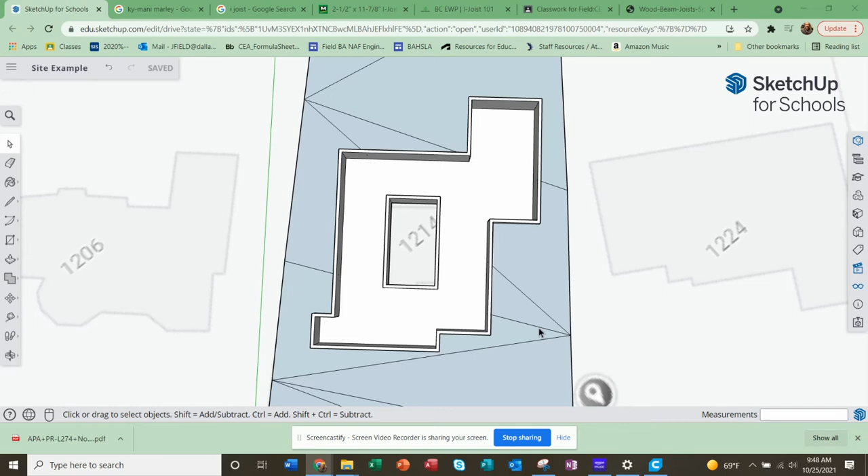Okay, welcome back. So hopefully you have something like this created already.

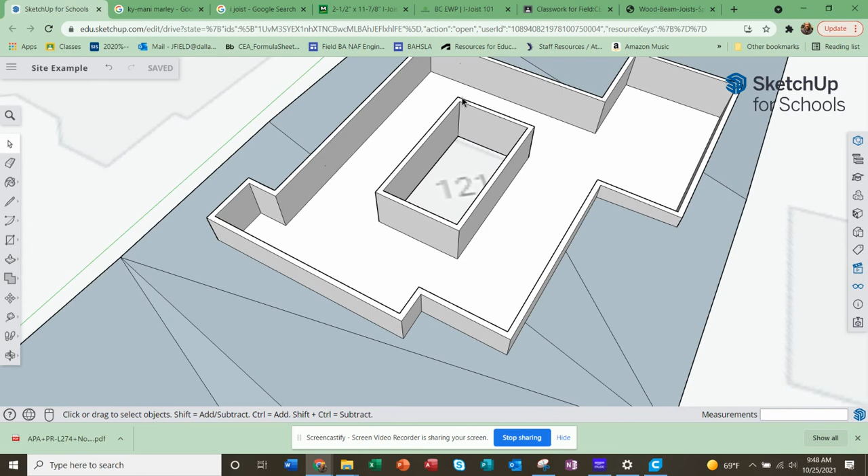You've got your foundation wall going all the way around, 12-inch thick wall, cement foundation wall, 18-inch thick cement slab. I'm going to leave mine open in the middle, and I realized that what I'm probably going to propose is that it actually will have a tree coming up through the middle. In this design, you can actually design it around an existing tree, if that was the desire you had for your lot.

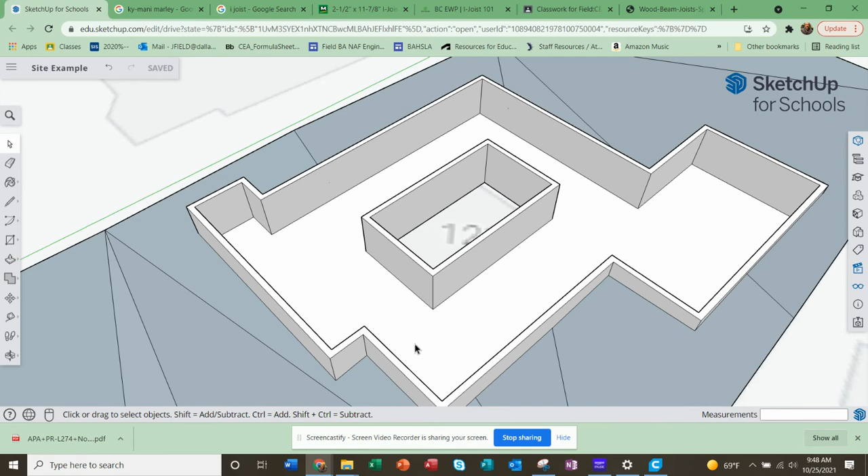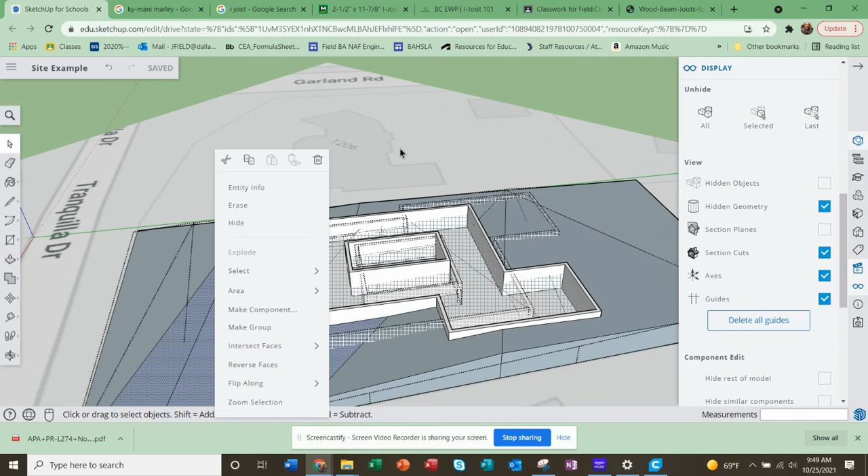And then you can see here, I brought the site elements back. I think a lot of you guys, I had you no-show those. So just go over here first, if you haven't done so already, to hidden geometry and click on all of those holding control, and right click and say unhide. It'll say unhide right here. And then click that back off, done.

Okay, so decking. I've put some resources in the Google Classroom that I want you to look through that are valuable. Here's a couple suppliers, Sherwood and this FP Supply. There's a lot of other suppliers, but both of them, if you look on their links, have pretty much really great detailed drawings and information about the I-joists that they sell and make.

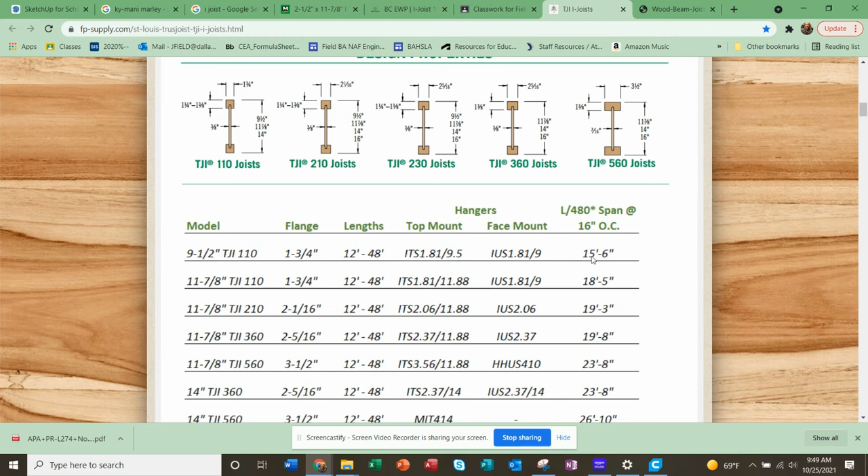And so from these tables, they sometimes refer to these as span tables, because basically, based on the length that the I-joist is spanning, you can spec it out. So you can spec out the joist that you'll need or can use.

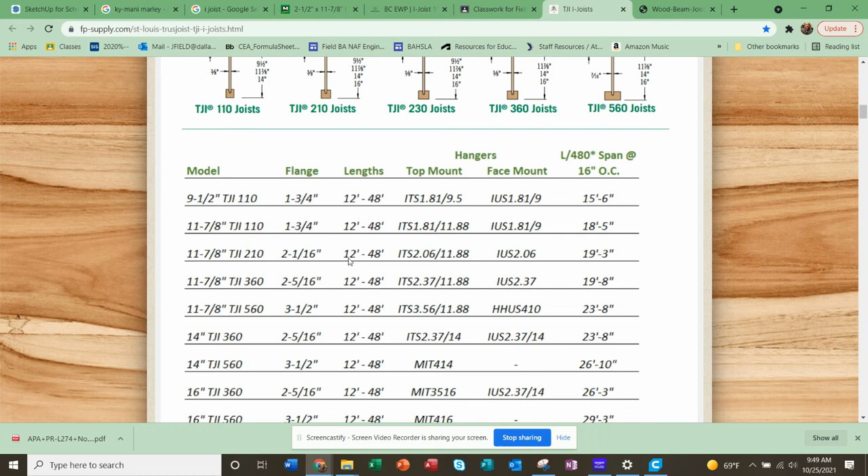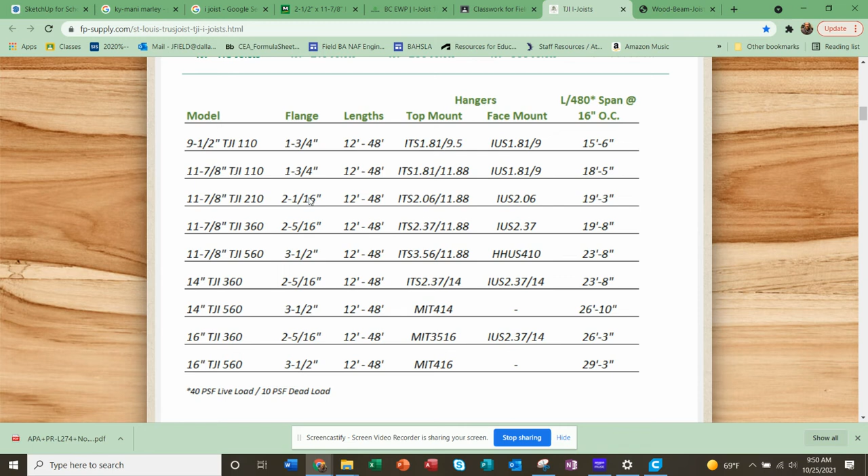So how this works is, this would be a typical span, 19 feet, right? And then it gives you the details about the I-joist itself. What is the model number? What is its flange? Is it top mount and face mount? So it's just information like measurements.

Most of these are going to be in that case where it's an I-joist that's either going to be basically 12 inches or a whole foot, or you can see there's 9.5, which would be classified probably more as a 10-incher. So you got a 10 and 12-inch I-joists. These are laminated up, engineered joists that have a lot more strength and rigidity and structure. So most people are using these, and you can have them every 2 feet instead of every foot, which is really nice. So make sure you're looking through these resources.

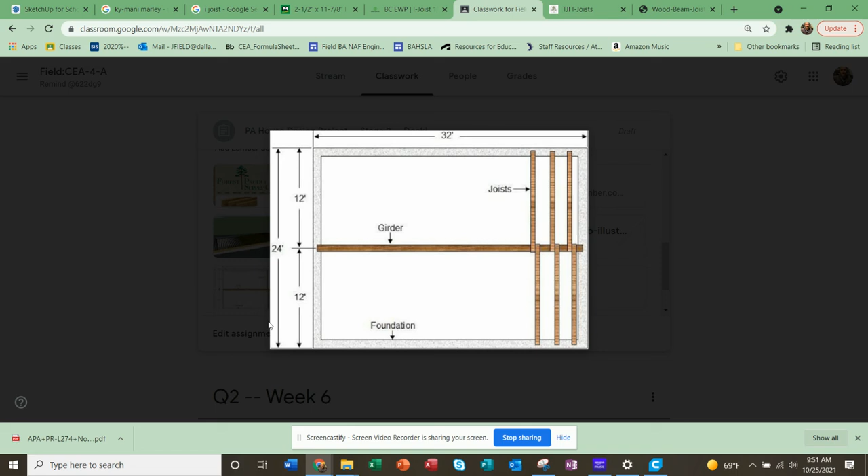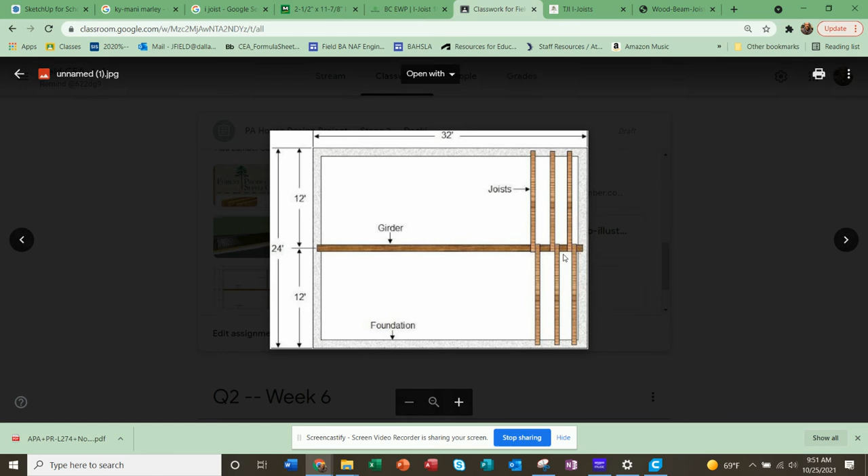Let me pull this picture up and talk about this, because this will apply in certain places. So you see most houses that we live in are built to this understanding. They're probably 24 feet, or roughly feet wide if they are that wide, because they had 12-foot joists originally, and then there was a girder to support them in the middle of the house.

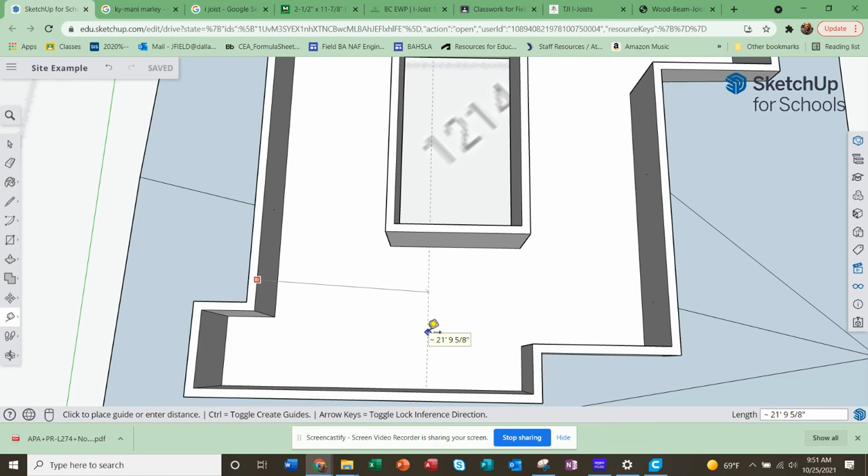Now, with our design, we can do a lot more, but I'm going to say that we should probably try and spec out to stick to the 19-foot joists. So if my math is correct, I'm going to measure from this edge to this edge. And you see, that's 21 feet right now. And that's 15 feet. So that would be fine spanning.

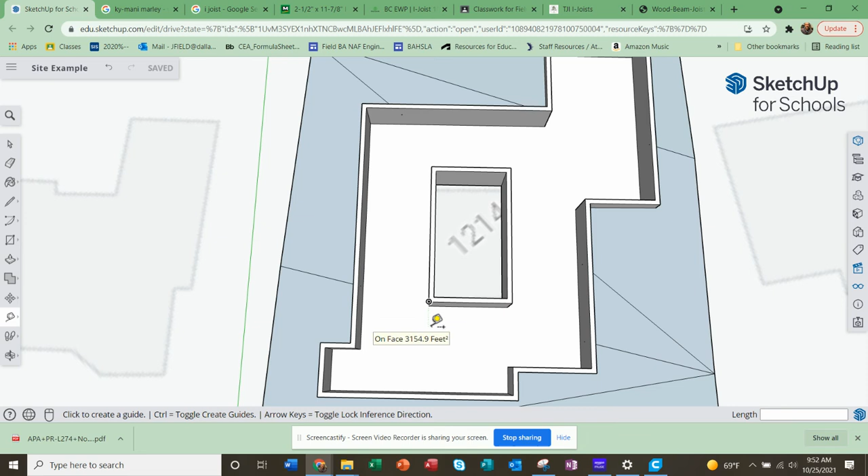But my problem would be here. I'd have to probably, I'm going to need to have 2 beams going across here and here in order to support the longer I-joists. I can see that already. But I'm just going to have to put them in and then go cut and trim them as necessary on my project here.

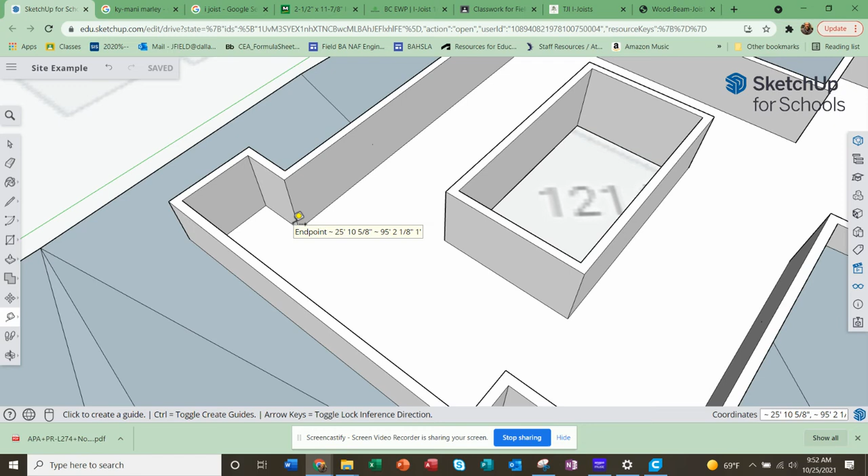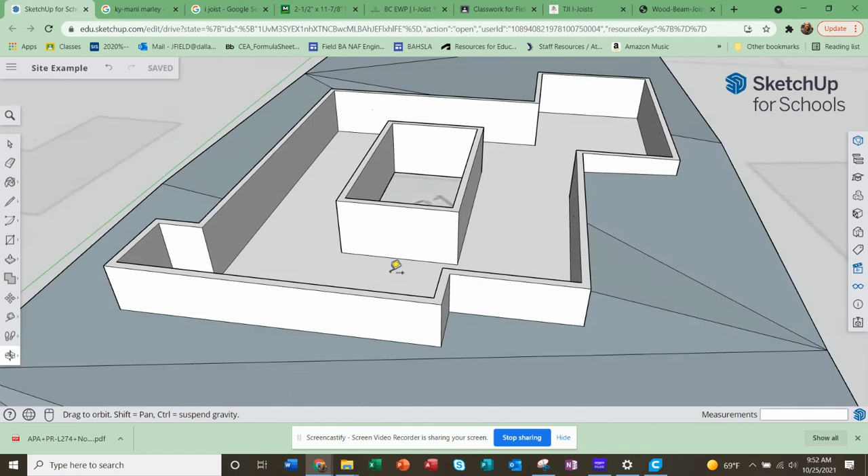Okay, so this decking, by the way, would be for in a case where we're not going to build an ICF wall. And I know I've mentioned ICF walls, but the reason being is I want to model the elements of normal construction for you guys so that you can learn how to deck it out and build it like most builders are building houses with lumbered walls.

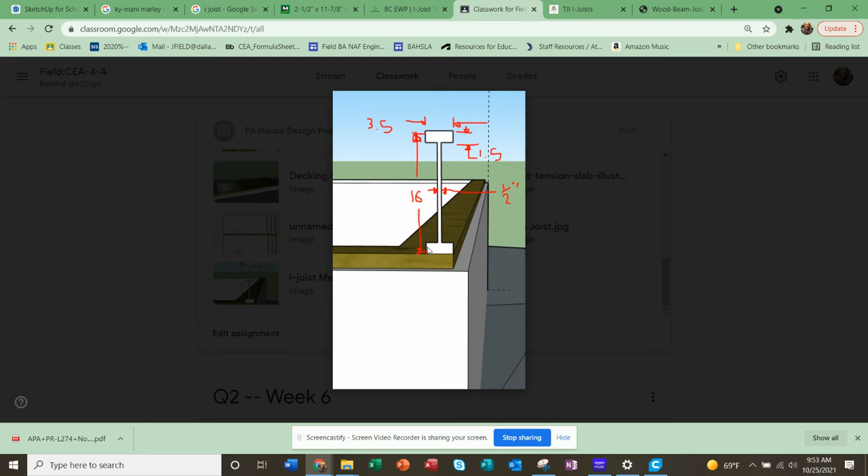Okay, so to put in an I-joist, you basically are going to draw the profile. But let me also, meaning that's why I put this picture in here, you just kind of come here. We're going to put the rim support board all the way around our foundation. And then we're going to draw one of these cross sections of the I-joist like this. And then we're going to extrude that and make copies of that.

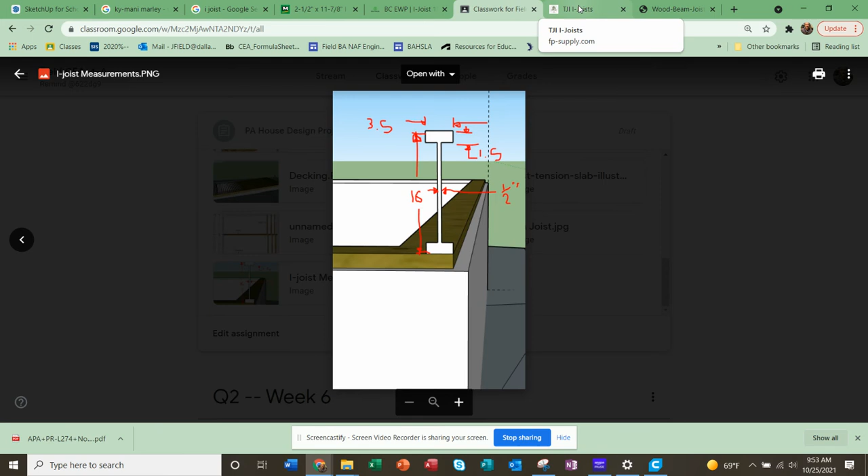So to make that support board, let me do that one more thing. Going back into the classroom, you'll find this really descriptive section of what we're doing. Here you have the foundation, the top of the wall, we're going to put the sill board down, then the decking onto it, a rim joist, exterior sheathing, and then the wall studs. That's a perfect section to memorize, and then the flooring itself. This is going to be nice stiff and rigid flooring, and it won't creak with these solid I-joists in there.

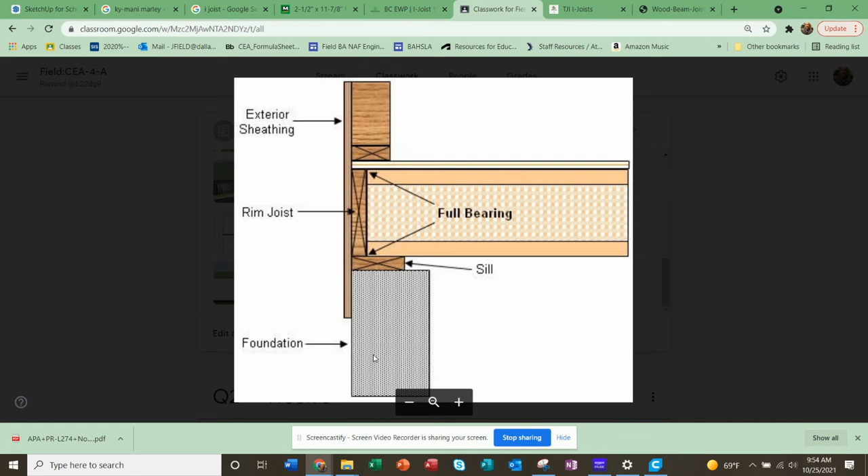So again, the offset tool is going to be our friend. I think in the case of that section that's an 8 by 10, so I should be able to offset this by 4 inches. There we go.

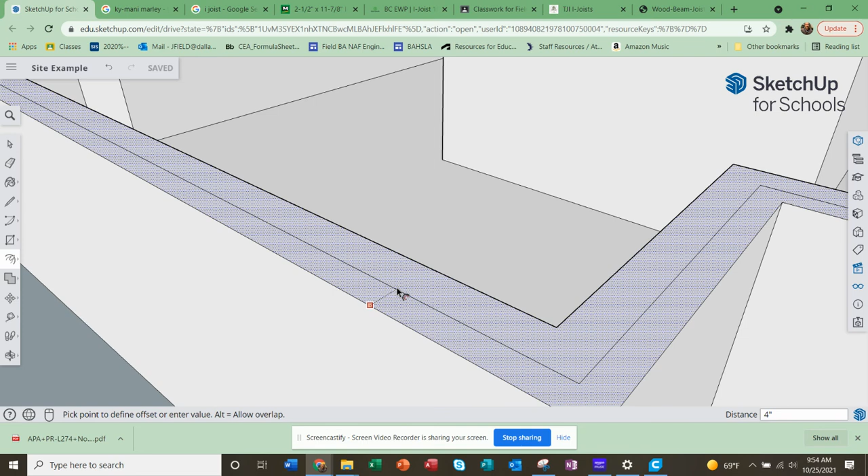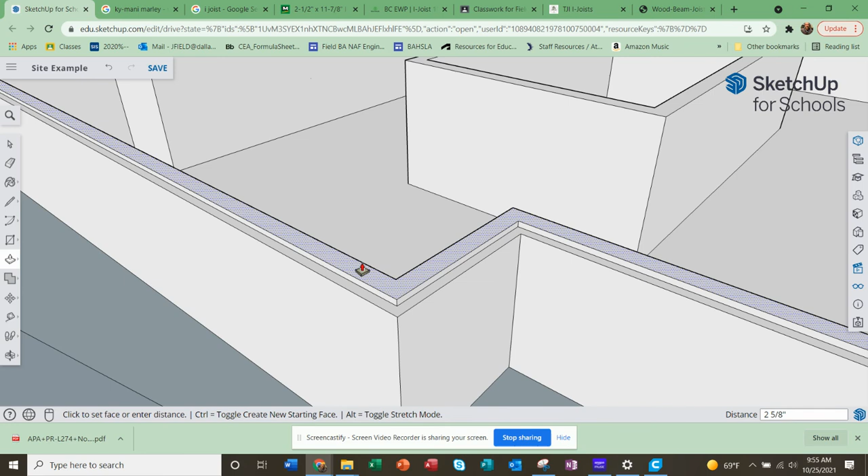Now watch, I can just use my extrude tool, right? Let me go pick it first. And I'm going to pull it up for 2 inches. It actually didn't create it as separate material on this side, you see that? So when I'm pulling up this time, I've got to hit Control. There it is, now it's a separate part. I think the 2 by 10s aren't actually 2 inches thick, they're 1 and 7/8, but I'm just going to round up to 2 for our purposes, okay?

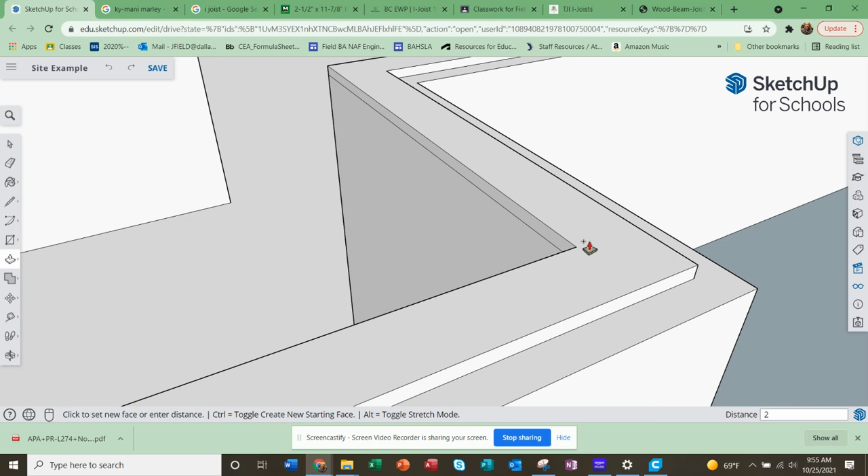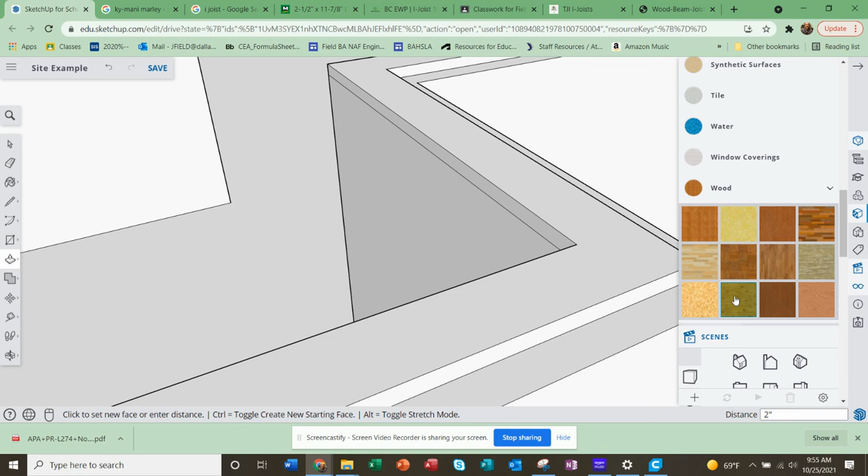And then paint it wood. Plywood in this case, or actually, yeah, that'll work, that finish. Lumber, it's lumber.

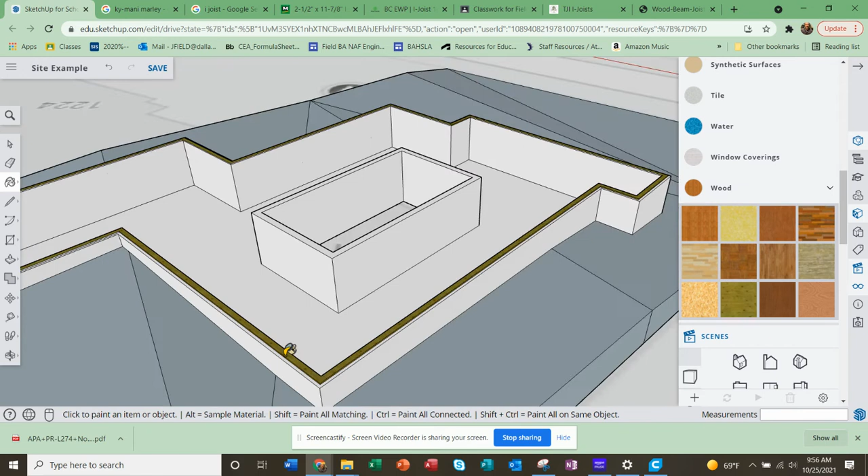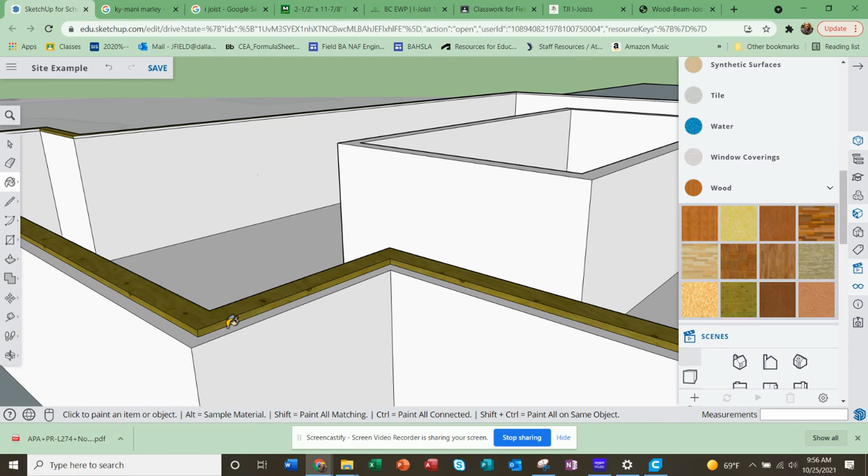All right, put that in. It's kind of fun to build, as long as you take your time. It's a lot easier than putting the real thing in, believe me, out there on the work site, sweating your buns off, doing the real work, which can be rewarding. And obviously it's good paying and can also be rewarding too. But sometimes it's just physical hard work.

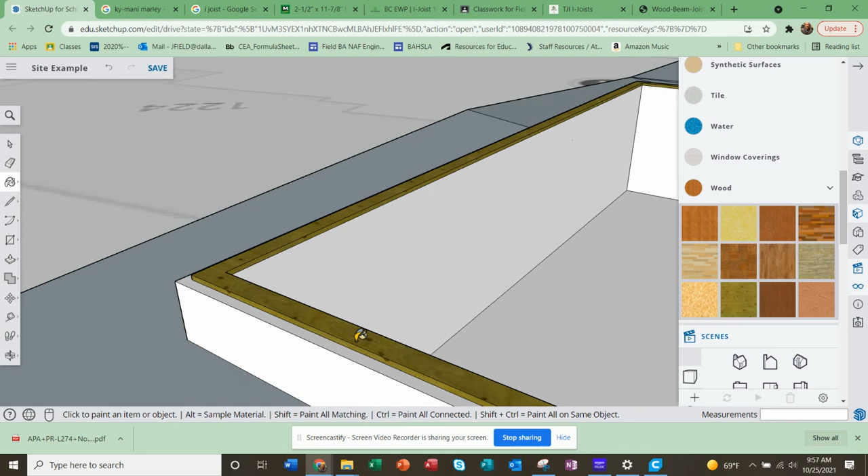Get all those cut. They would actually all, by the way, even if we weren't going ICF walls, there would be rebar coming up through the top of all these walls and going through a hole drilled into this sill, this sill board that we're putting down. There would be rebar sticking up through holes drilled in the sill board, and actually the wall studs themselves would have holes, and also they would anchor. Those would serve as anchors to hold the house down, say for high winds. So I'll show you what that looks like here.

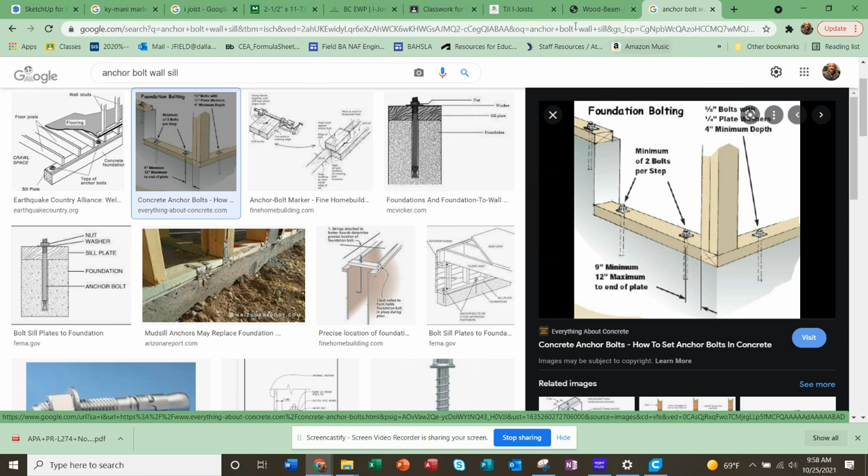This one kind of shows the best picture, and that's how it's done. The hole is drilled into the wall stud and through the sill board and actually molded into the concrete. Then you thread a nut on top to hold the wall down. We're going to skip that element right here.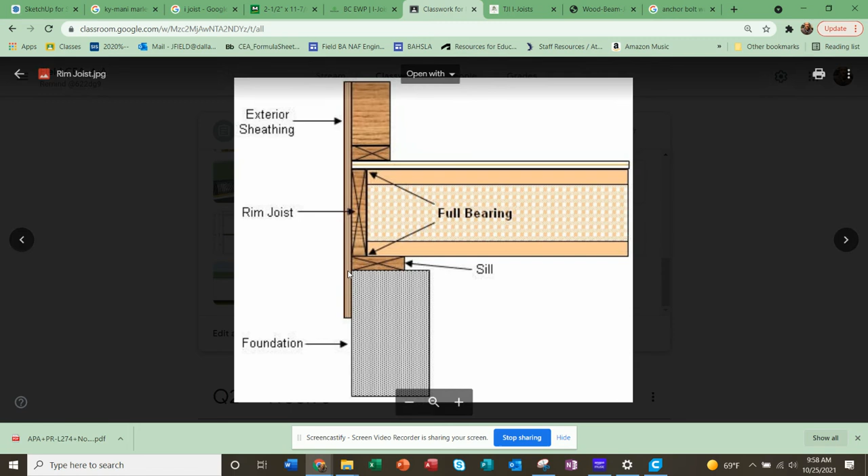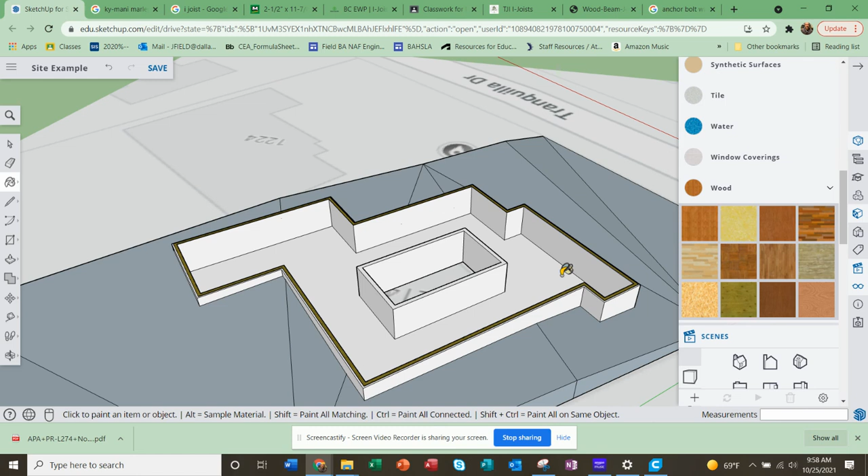Okay, now I'm ready to - and by the way, we'll finish the other parts of this lesson later, the rim joist later on, but we'll focus on trying to model up the I-joist for right now. So I think the orientation that makes the most sense is going this way for my particular build, but that's going to have issues with my house. I'm going to have beam supports on both front and back for the long spans where it's going this way, where it's going this way, and this way. I'm going to have long spans there that I need to support underneath.

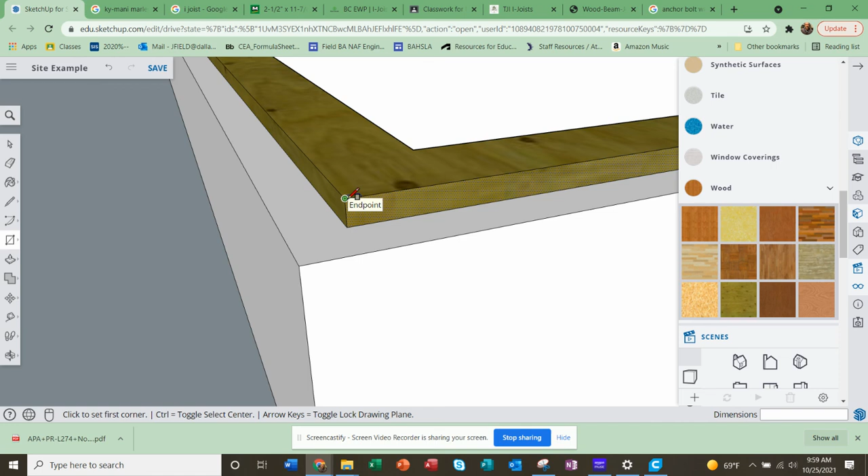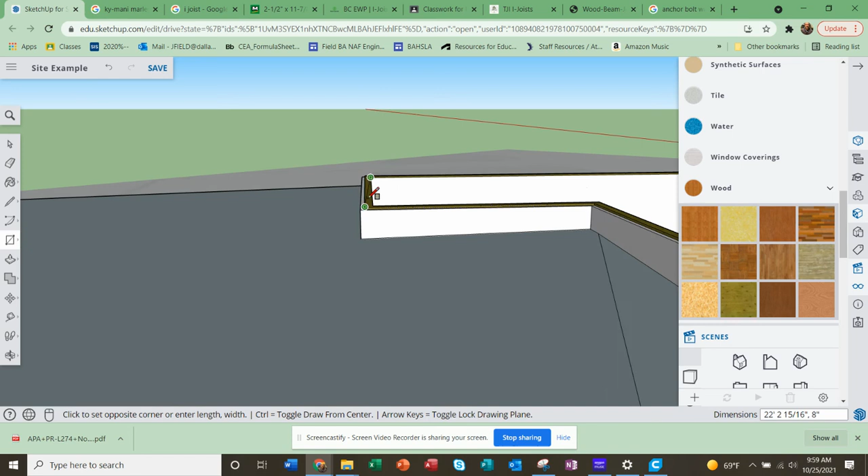But I can at least just start. Where I'm going to start to put that on is I'm going to kind of pick it off that plane, and it's just going to start as a rectangle on this face. So I'm going to hold shift, actually here, do it more normal. There we go. Sorry guys. All right. Oh, there we go, oh my God. Here, I gotta unclick it.

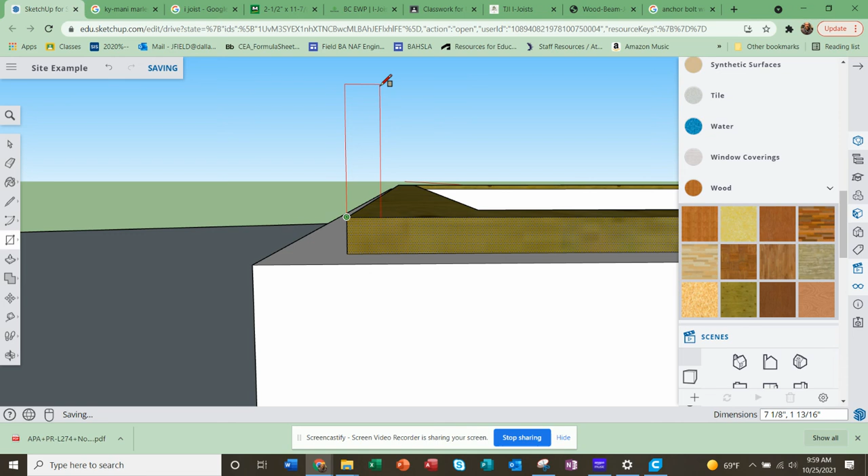All right, there it is. So in this case, I'm going to design this to use a 12-inch I-joist. And I can actually peek at that catalog again really quick.

That's the most available size, the more standard type of I-joist. You can see in this case that it's anywhere from 1 and 3/4 as a width, all the way up to 3.5, and you're talking about the longer spans that can handle right there.

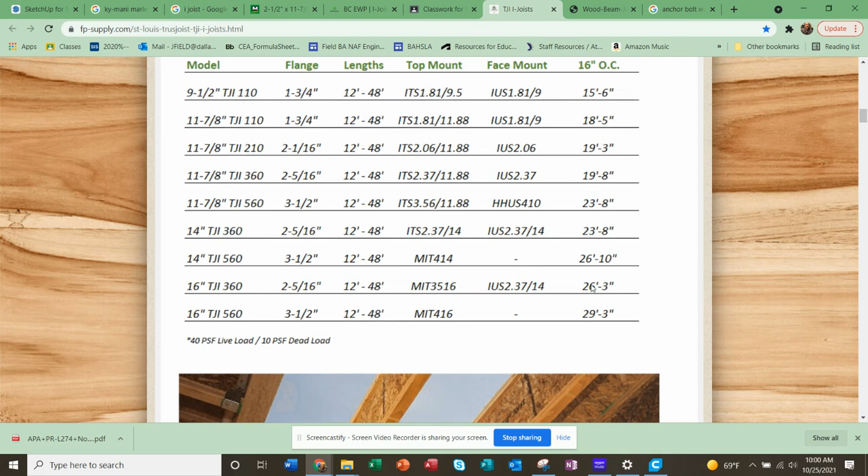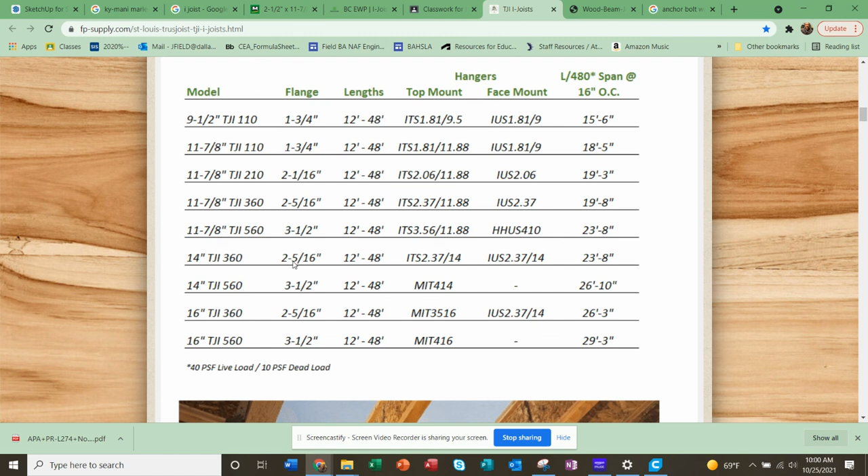So 360, I think that one should get it done right there. And that's got the 2 and 5/16. That's this one. So actually, it's this one right here. It's going to be 11 and 7/8 tall, the overall rectangle, and it's going to be 2 and 5/16 wide.

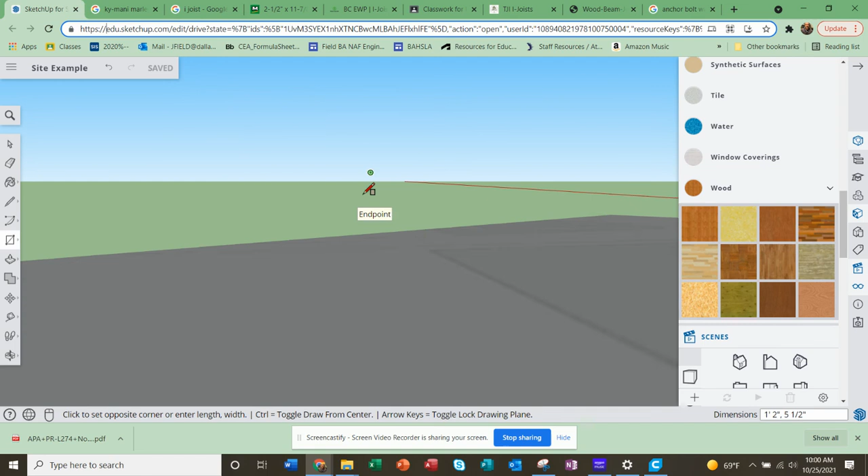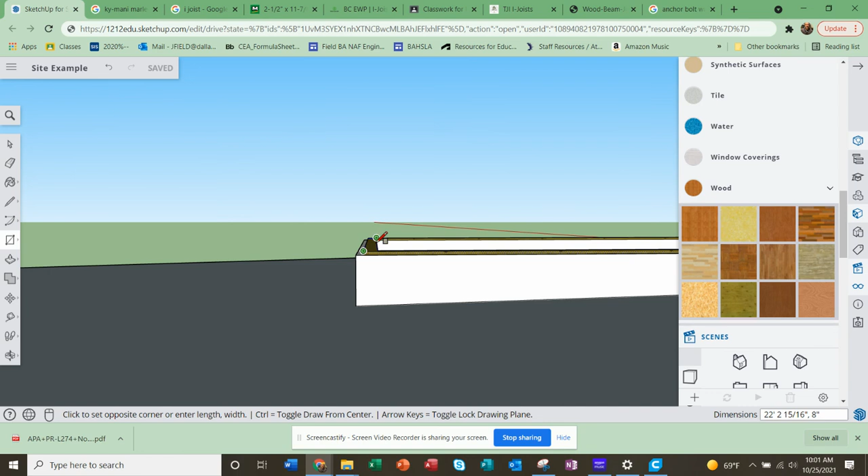So actually I can just type that in over here on the left-hand side. I'm just going to go ahead and round that one up to 12 inches for us. Sorry that I'm really struggling with this. Try this again. There we go.

12 inches, and then comma, that's the height. And then the width is 2 and 5/16. That's a quarter, we'll call it 2 1/4 inches.

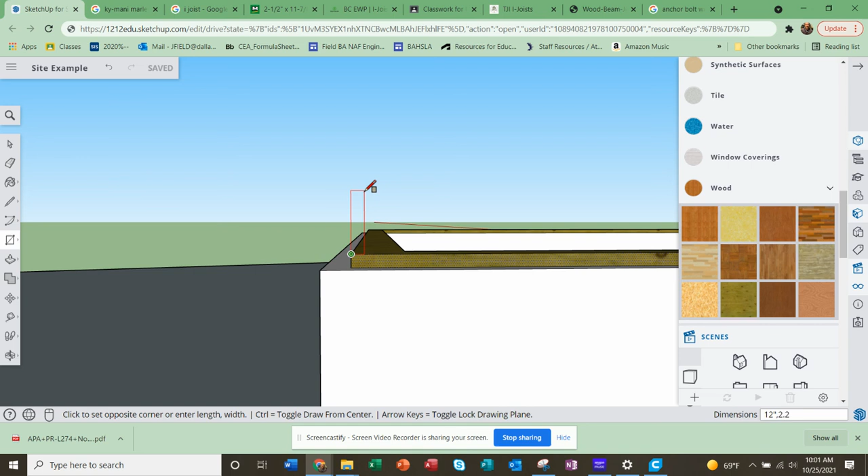And then the other top part of that is 1 3/8, which is the width or height of the top and bottom beams there that make up that little I-joist assembly.

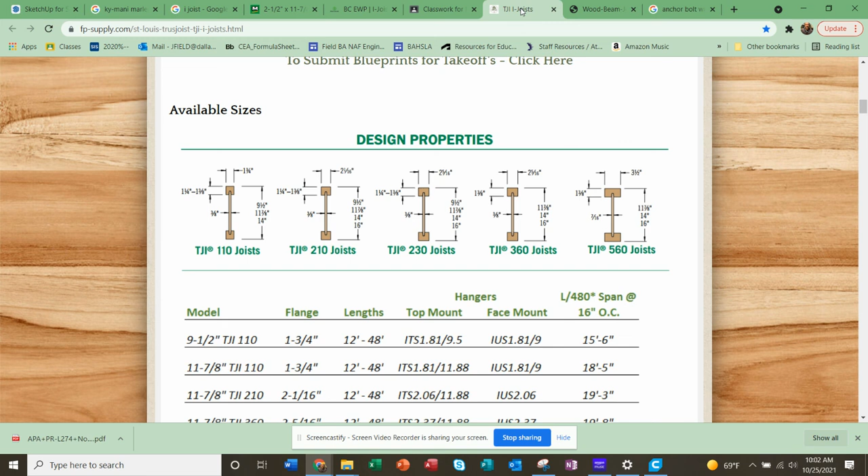So I'm going to go ahead and put that in like that. And then I know that second measurement needs to be 1 3/8 - that's perfect, just like it defaulted to. There we go, I'm going to do it again.

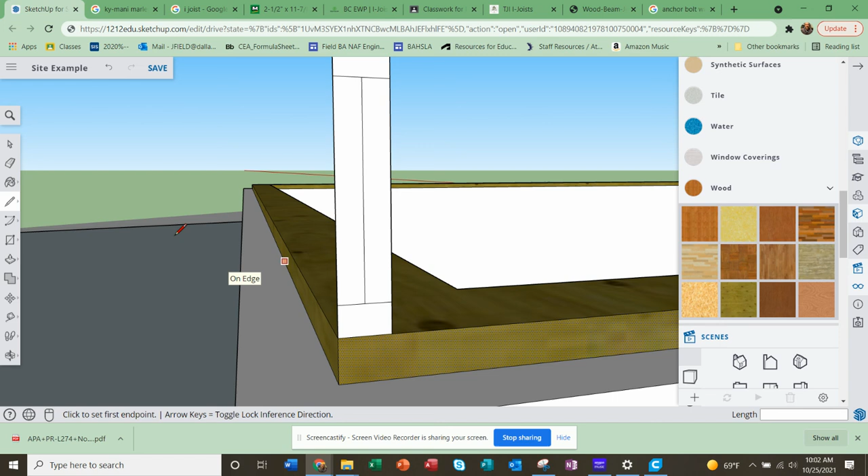And then lastly, I'm going to put a line going down the middle like that. And I'm going to actually - well, actually no, I'm going to leave that in there.

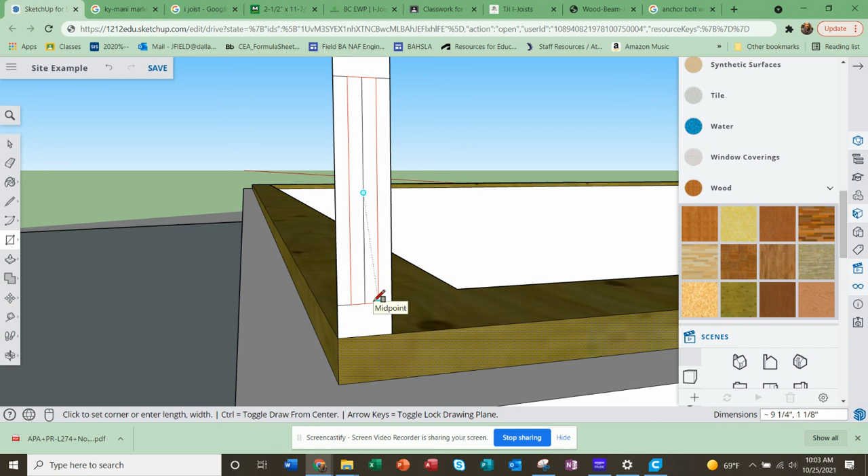I'm going to do the rectangle. I'll hit Control and do the center point rectangle now. I know that I want the width there to match what it comes through on the drawing, and it's only 3/8 to the web in the middle - it's called the web part of the beam. So here, I'll have it default kind of like it is, and then have it be 3/8. See if I can get this to be 3/8.

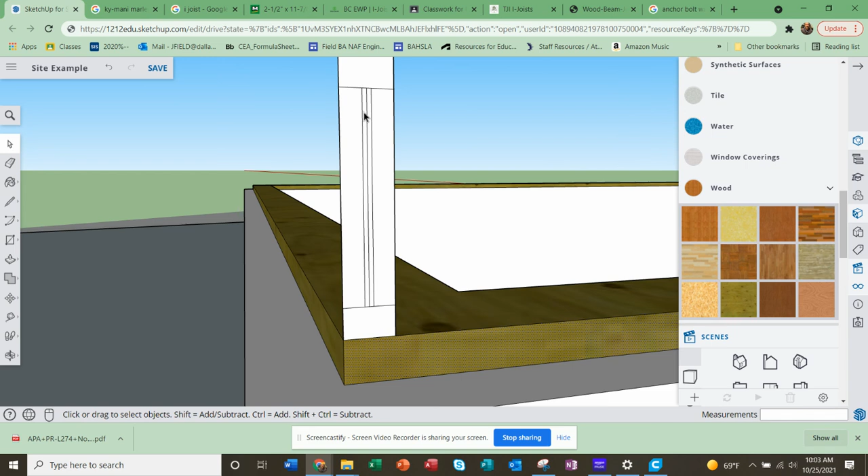There it is. And now you can actually go back and delete that line, you don't need it anymore. And you can delete that one and that one. Now, actually, if you want to, you can also delete that one and that one.

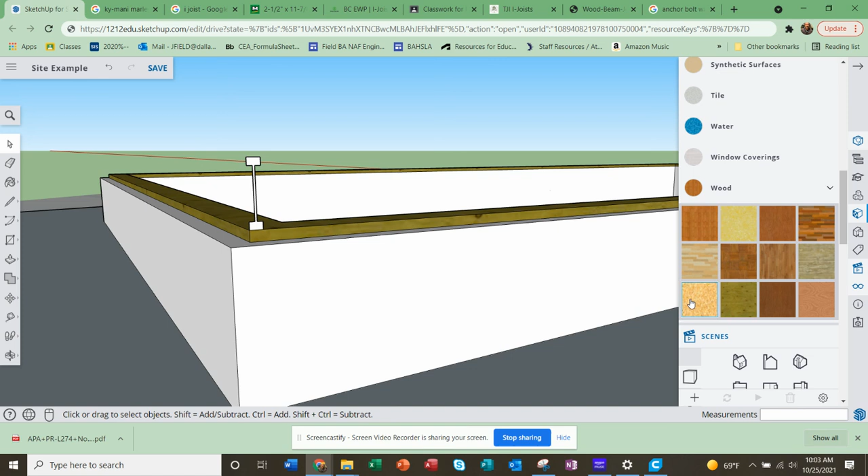And you can make it look like the plywood that it is, really. And then you're going to extrude it across that length.

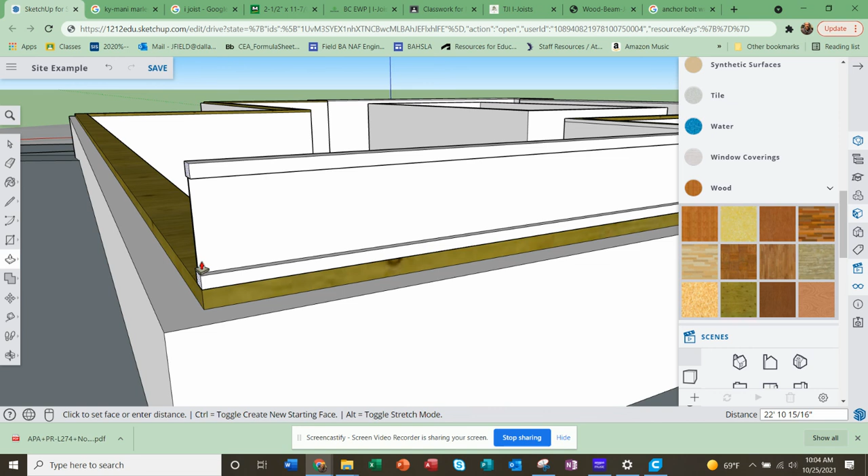Get the saw cut. Now I'm going to be able to make copies of this as I go along and fill up that first level of the foundation. And maybe what we'll do is we'll save that for the next lesson.

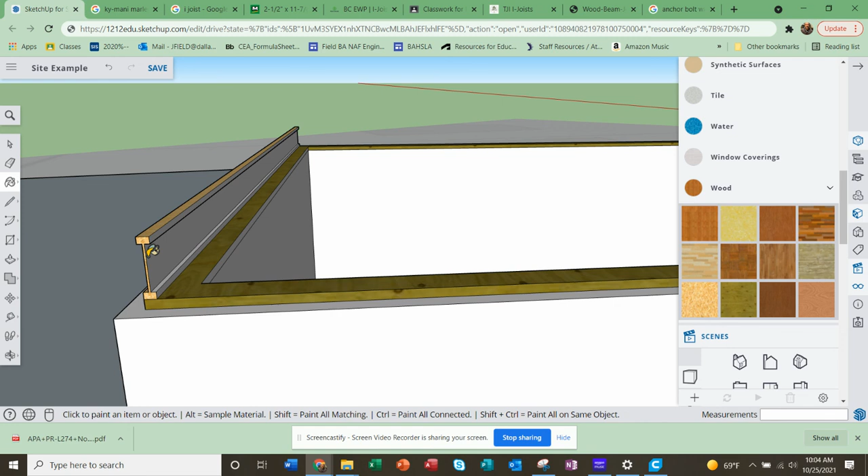Just color this thing for now. You'll probably want to group it, so pick all the separate faces and put it in its own group. And then we can make copies of this and cut it and size it for the different locations.

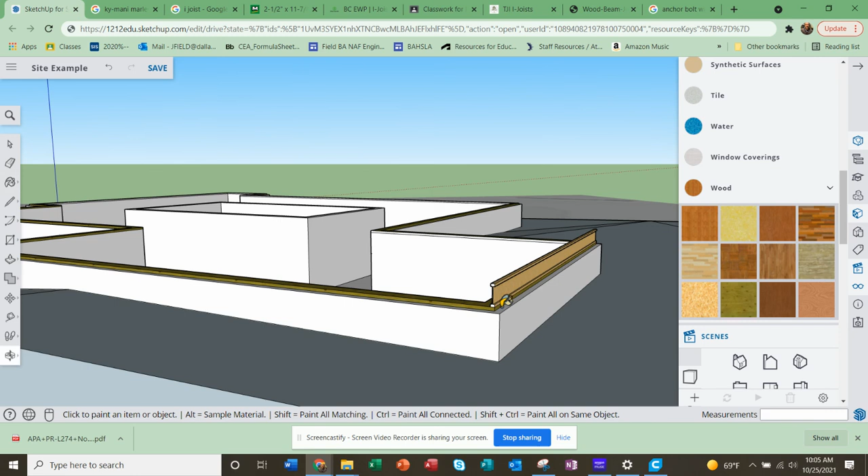We're going to use 2-foot on center spacing, so we'll try to avoid needing to make one every foot and go to one every 2 feet instead. That's what the builder really is shooting for. Okay, that's enough for right now.